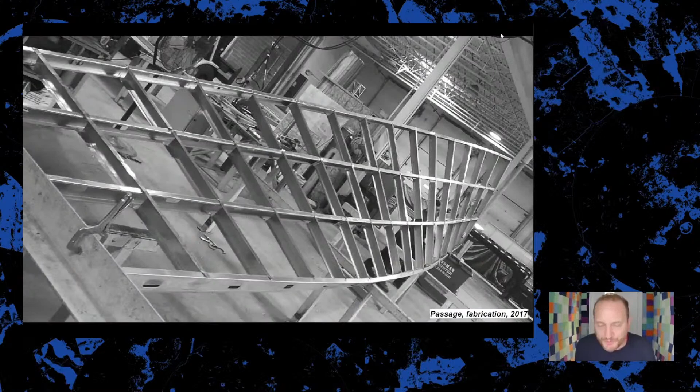We've always been very interested in the pliable and the elastic—experimenting with how one would live in an emergent, dynamic context in which things and people act and behave in ways we ourselves could not anticipate. We like to bend and ply and shrink wrap and extrude and pull and bend, not just in models, but also with the material itself.

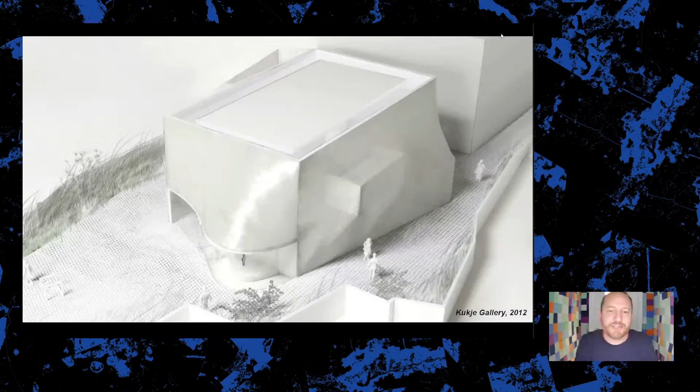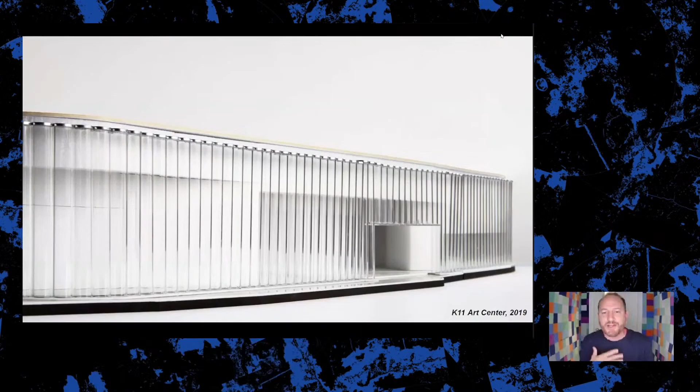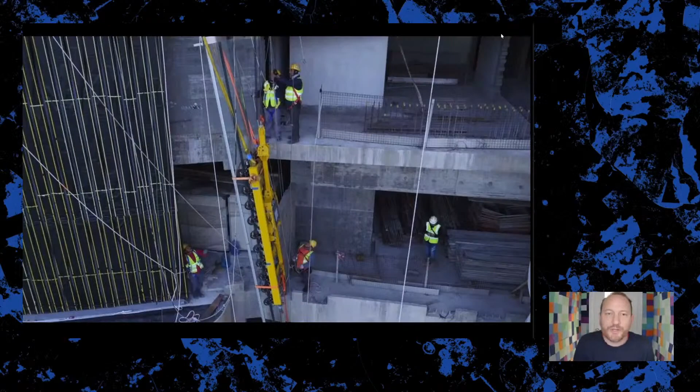Or, for instance, in Hong Kong, where there's an interest in refraction and depth of a facade that needs to sit in the center of Hong Kong harbor—we end up in a very different process, in a factory in southern Germany. You couldn't be farther away from the village in China. Then, with alpine-type construction, we hang 400 tubes on this podium on the harbor front of Hong Kong.

That idea of elasticity and the pliable, but also experimentation, has led us currently to a broader and more involved practice, wherein we're not just drawing lines, so to say, but there are many strings attached. Today I want to talk about four projects currently in the studio, or just finished recently. Todd showed you the unfinished business—these are the projects about to finish or finishing now.

I want to talk not just about the architectural ideas, but everything that comes with it once you go into the world and work with a wider range of people, on more complex and more involved projects. I'll start with one of the largest projects we've been working on, maybe the most complex and longest lasting. Where we started with temporary, quick installations, currently we're working on something that could take forever, so to say, which makes us think about time and a project in a very different way.

This is the Niagara Gorge, the Niagara Falls, the border between Canada and the US. We're involved here in a strategic master plan for Art Park, which should take at least 30 years. I want to talk about this project because it made us think very differently about the way we as architects actually operate within and on the world. Specifically, it has a lot to do with the soil, the earth, and literally the planet.

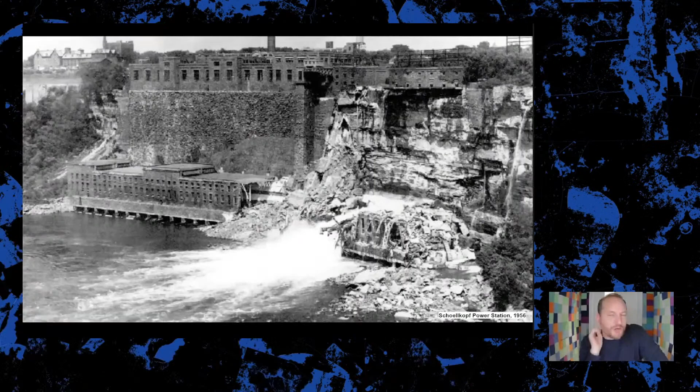This is the site we're talking about, in Lewiston. It burned in 1813, but was constructed earlier and was never there for a long time. It also was the place of the Tuscarora First Nation village. There was a bridge here, where the train came by. You see how the site drops in two plateaus.

The story of Art Park, the park we are currently working on and have developed this master plan for, found its origin in 1956 when a power plant collapsed. The Niagara Gorge, apart from being a beautiful site, is also one of the main sources of energy for New York State, generating an incredible amount of hydropower.

This was right after World War II, when America was booming in the post-war era, and there was a lot of manufacturing happening in north and western New York, and also in Ohio. Much of that manufacturing relied on hydropower, and when this power plant collapsed, suddenly the state was without power.

Rockefeller, then governor—as you can see from his plaza in Albany, a man who liked to use the modernist hand to create and control his destiny—brought in Mr. Power Broker himself, Robert Moses, to build the Niagara Power Project. Within three years, they opened the largest hydropower station in the Western Hemisphere, the power was turned back on, manufacturing stayed, and the economy soared again.

But in order to create this very large power plant, Robert Moses had to dig a very large lake, situated on the land of two First Nations, the Tuscarora Nation and the one I mentioned before. There was a large protest, because they actually had to disown their land to build this power station.

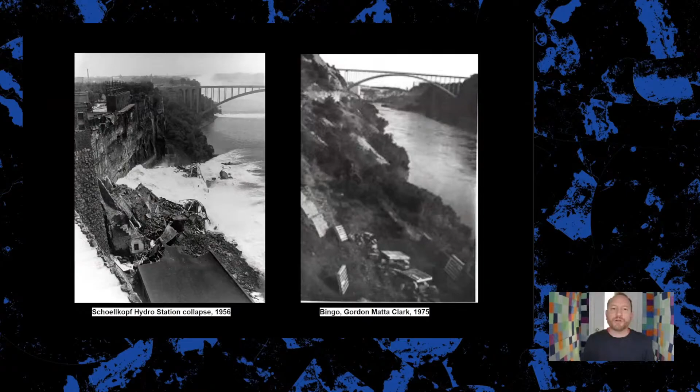In some way, Art Park, as it was renamed, was the birthplace of land art and environmental art. There are a number of very important pieces. For instance, Gordon Matta-Clark in some way reenacted the hydro station collapsing down the gorge. Here on the right, a performance piece.

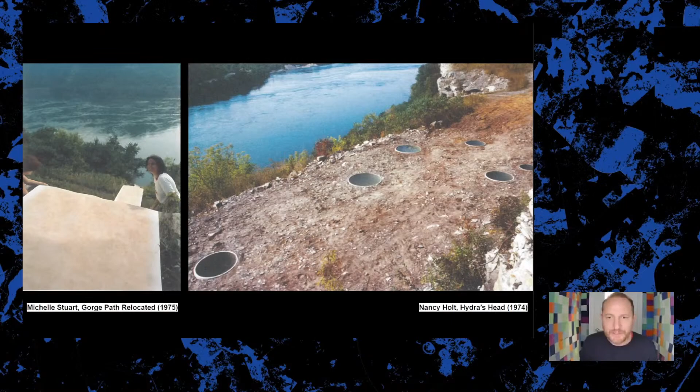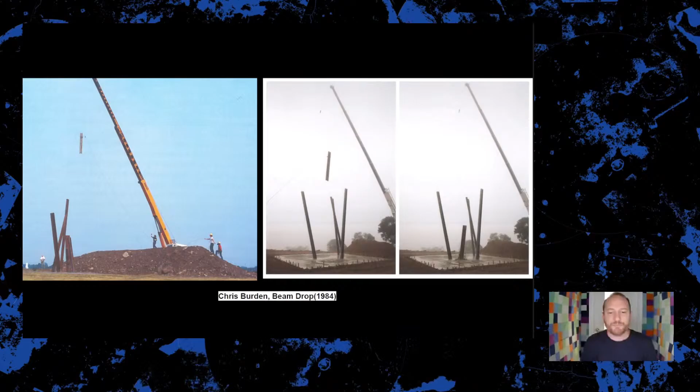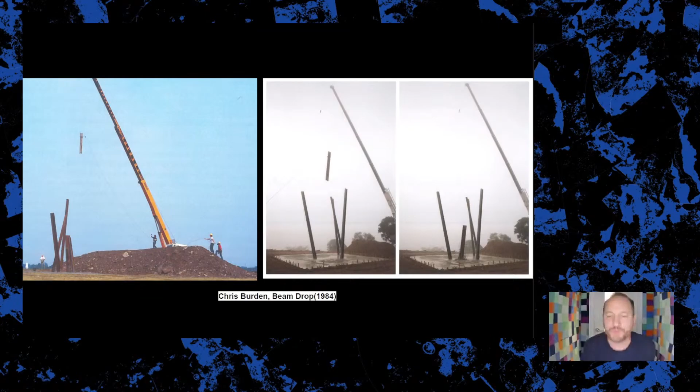And the most maybe violent and most expressive and most aggressive form of land art was probably Chris Burden's Beam Drop, who had a big pool of concrete and then with big cranes, let steel beams drop into our planet, so to say.

So the land there is not a beautiful romantic piece of landscape. It is soil, it's a pile, and it is being worked and reworked, and it has these layers and layers of history. After '84, the more experimental phase stopped, and it became more of a destination for community art.

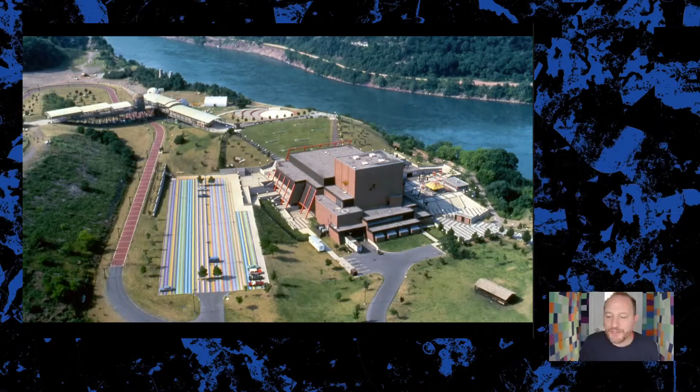It's still there, and it's very hard to use. But in those days, it was a very successful place, and many of the local residents loved it and had some of their best experiences there. For anybody you ask, who is of a certain age, Art Park was an important site.

Now, fast forward a number of years, the funding dried up. There is no more Rockefeller. There's no more experimental art. Land art has shifted—now there's environmental art, but not on this site. So in some way, the site is still there with all these layers of history and all these different sort of sediments. But in some way, it has lost its pulse.

So we were called in through a competition and an interview together with West 8, the landscape designers, and Charcoal Blue, who do theater and venue design, to make a master plan.

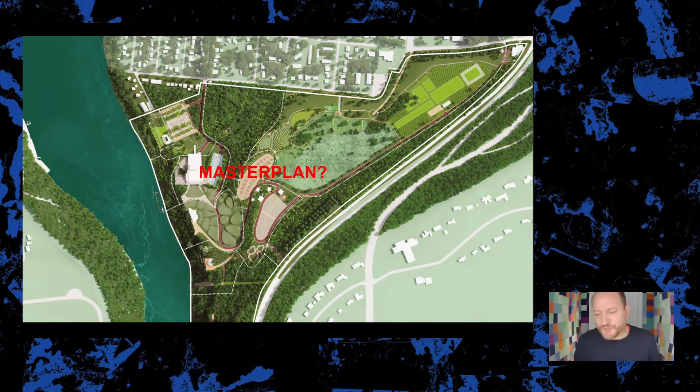And how do you do a master plan after so much has happened to a site? First of all, we don't really believe in masters. Maybe we believe somewhat in plans, but we also very much believe in processes rather than plans. The plan sort of suggests that you know what will happen. I think for us, specifically a project like this, we wanted to approach it in a different way.

We visited the site. It's beautiful. You see the gorge, the sort of depth, the section of the landscape. It's intimate, and at the same time, higher up, you have this expanse. At some points, you can see Toronto at the horizon in Canada. But in many ways, it is sort of a quite empty and very inactivated and sleepy site.

Only once, or basically 12 times a year, it's still used for classic rock concerts. And the director told us there's a problem: the audience is dying, the acts are dying. What should we do?

We visited Sammy Hagar. He, at 72, says we need to do something. He brought Jason Bonham, the son of John Bonham, in, but still it is a very particular usage, which only happens and only activates a few, so to say.

So we started to just listen, and we started to listen to the people who had a great time there, and they were just reminiscing about how we could bring back that old energy that Art Park had.

But we also toured the site with representatives of the First Nation, the Tuscarora Nation, and they had a very different approach. They said, we don't want you to just recognize that this is our land. We want you to not touch it and be respectful, and not plan, certainly not touch, certainly not dig, certainly not unearth anything that is here, and just let it be, so to say.

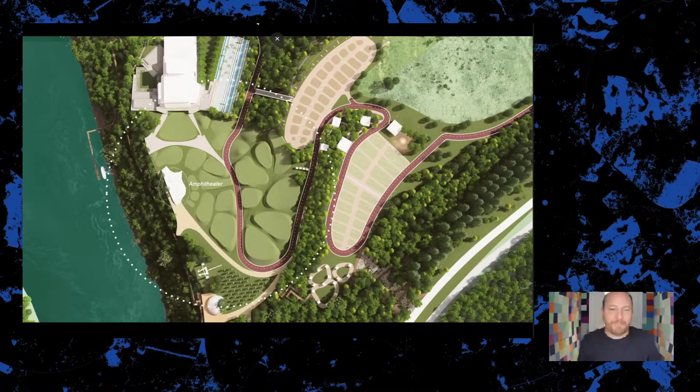It comes through here, you see the spine, it comes through this renewed amphitheater. One of the first things we needed to do for Art Park to survive was to reorganize the amphitheater, improve its sightlines, and make it a year-long venue again, because many bands and acts were not wanting to play here anymore.

So this first project we're now pushing forward is the reconstruction and upgrade of the amphitheater. We wanted to work on this idea of the artificial landscape, not by excavating, but by adding a number of artificial hills that are, in themselves, when nothing is going on, a very attractive and maybe somewhat surreal landscape.

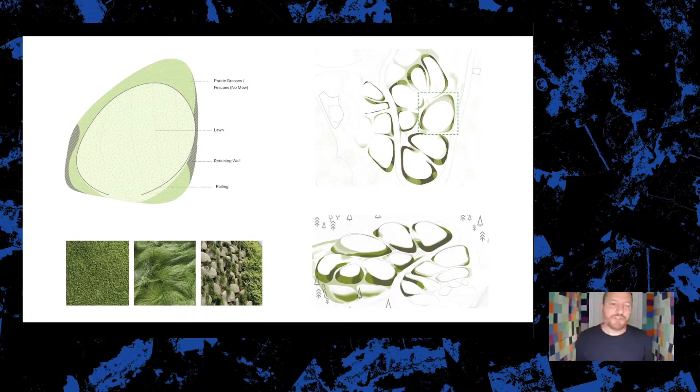At the same time, when there is an event, it can be used as a way to watch it, to see what is going on. So we worked with West 8 to create these artificial knolls, these artificial hills, that together become the amphitheater. They shape this vineyard-seating, 10,000-person amphitheater that grazes the hill along the gorge.

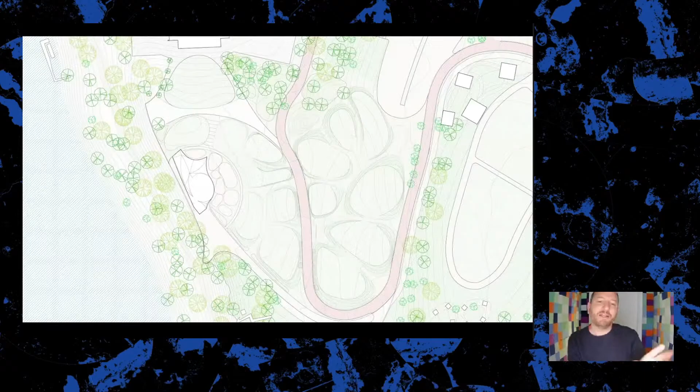With a view towards the water as you come down, you see the red spine going through. Here you see it in section, here in plan when nothing is happening, and here when the events happen. The first part is really a fixed stage, but the rest is hills that are also fun to sit on and picnic when nothing is going on.

For the band shell, this first project, we wanted to work with a somewhat futuristic and experimental structure, a tensegrity structure that gets draped with a skin that generates energy through the sun, helping amplify the music, because you'd be surprised how much energy a live stage and live concert actually takes.

The idea is that we would run the entire concert on renewable power, both by tapping into the hydropower and by generating energy through the band shell itself. As a first teaser, we recently reinstalled an installation we had done for the High Museum in Atlanta last year, called Murmuration. It just landed last month and opened on site as a first step in this ongoing project, which probably will take three decades.

I'm trying to keep the pace so that Todd and I can still have a conversation, so I'll switch from one countryside to the next.

This one is northern France, near Strasbourg, at the border of Germany, in an area that throughout history has been both part of France and sometimes of Germany. Meisenthal in the Vosges is a hilly, beautiful, wooded landscape, and this landscape was a very important site for the birth of glass making and the glass craft within this region.

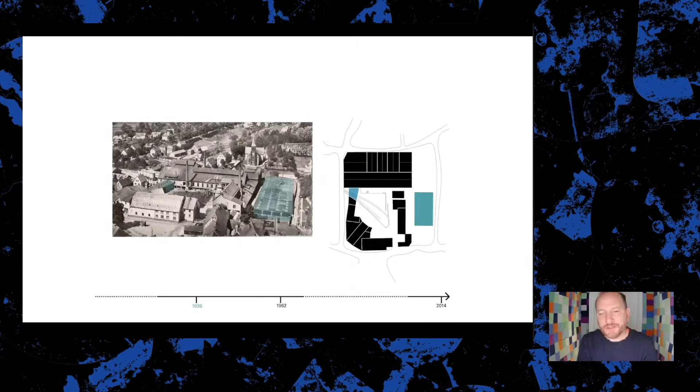In 1969 it went out of business because of different manufacturing techniques and the way the world transformed, and the factory closed. Over time, the morphology of this site became one of addition, erasure, removal—different layers of time that are very clearly legible and present on the site.

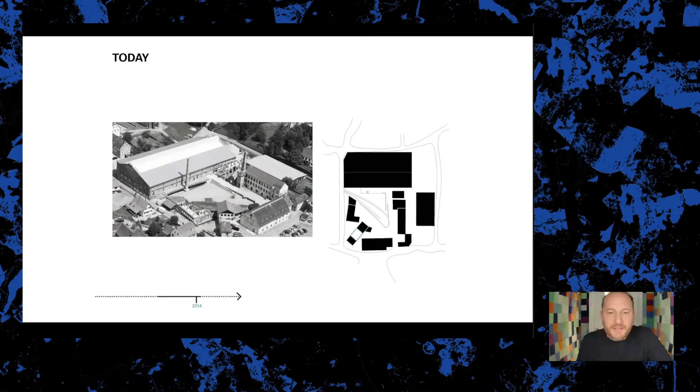This is not today, this is six years ago when we were invited to do a competition. Here you see how we found the site in this bucolic landscape. Within the center, the old factory was really the town square—you see the church is even off-site here. The factory was the de facto square, and the yard of the factory is where the entire community came together.

When we came, there were three different organizations using the facilities. In the big old hall there were concerts, mostly regional, up to 5,000 people. Then there is a glass blowing facility where quite good artisans from around Europe come to do glasswork in a studio setting. And then there was the old office building of the company, now a museum for the history of this town, the region, and the factory.

And then some ruins over here. So the job was actually to transform these independent organizations into a centralized center for glass, bringing these three completely independent, separately operating organizations under one roof, so to say.

We thought of these four elements and the elemental aspects of the making of glass, thinking about the idea of the earth becoming molten, so to say, and shapeable. We started to think of these layers of history, layers of time, and the pliability of that sediment.

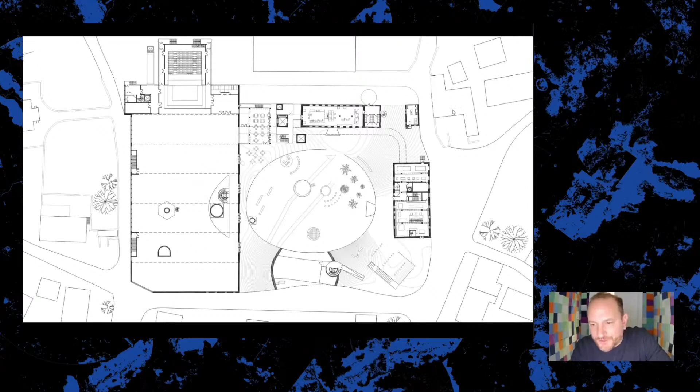We reclad one of the structures and built a double, in a way, as new glass studios—you see them over here. This is the upper level of the ground, so to say, and here's the map of the lower level.

And so here you see the new entrances, the dressing rooms and the backstage area, the entrance to the museum, the entrance to the store and the education facilities, and here the entrance of the museum, or of the glass studios itself.

This is about to open in January. When you come to town, you see these really quite interesting additions and material piling up, so to say, of different eras. And suddenly this building appears, juxtaposed, the old and the new. But it's not just the old and the new, because it's a constantly evolving series of additions and removals.

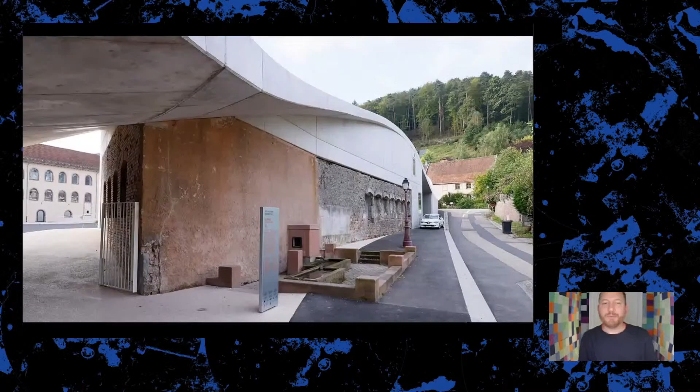That have happened to the site over time. And ours is just the last in an ongoing process. So the theme, even at this site, of history continues. History sort of flows, and you see in the way the layers come together, this build up.

This is the entrance you see under the slab, if you want, and you come into this old square. We kept the old train tracks that were used to bring the wood, basically, that was used to heat the ovens in. Here you see the old building and the two new glass studios.

One is poured in place concrete, the other is precast concrete. Here the entry to the music venue. Looking the other way, this is where the cafe and the store is, with the education spaces above.

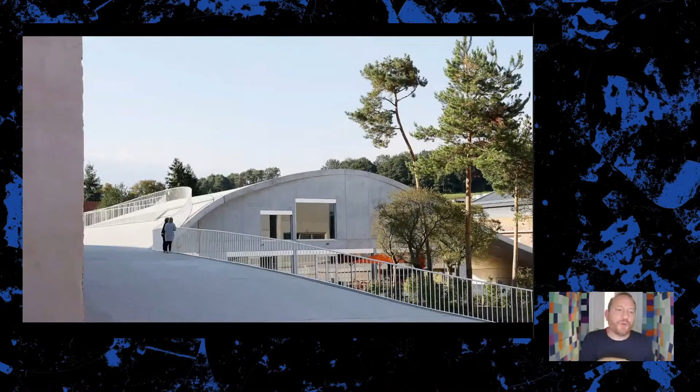There's ways to get up and under the slab. Here's the entrance to the museum. This sort of engagement, being close to these layers of material and time, and then being able to go up and look back at it, makes for a very dynamic and very communal new experience.

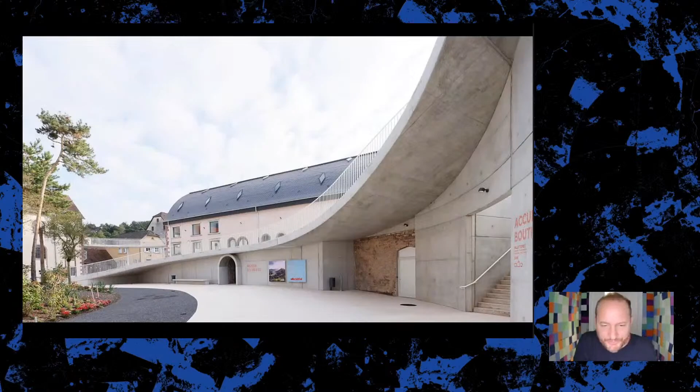We inserted a black box theater in the performance space, which is very flexible. One way it's like a completely closed space for 250 people seated, but then the stage can move to the back and open towards this big hall, which you see there in the back.

And so the stage, sometimes they can play the other way around, and there's 5,000 people in the audience of the old factory hall. And here you see the glass shops and their theme of the history continuing.

So from northern France, there's two more stories I have to tell you, with all the strings that are attached. We're going to Mexico, to the city of León, which is 3 hours north of Mexico City, where we were asked to think about and respond to a complex issue, which is housing, generally affordable housing in Mexico.

In Mexico, if you know it a little bit, there is a large population of informal housing. A large part of the population lives in unregistered homes, so to say, just because there's no access, they don't have financial access to the housing market, and because people can build on public land without necessarily being removed. So there is this question of how can we help or make these people part of the formalized housing reality.

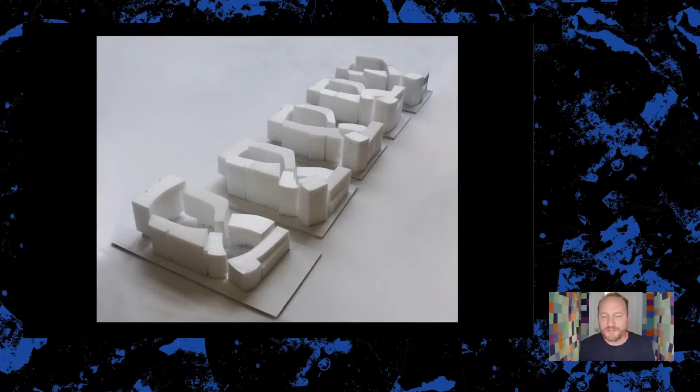The second thing we thought is that housing often becomes very anonymous — you don't know anymore where your home is. Since it was a corner site, we felt we needed something with clear civic presence on the corner, but also broken down, not some massive singular building. So we thought of it as an assembly of different parts in which you can recognize where you live. There was an ambition to make all unique homes, where every plan is specific, so you know your home is a little different from your neighbor's, giving people something to talk about rather than everyone living in the same box.

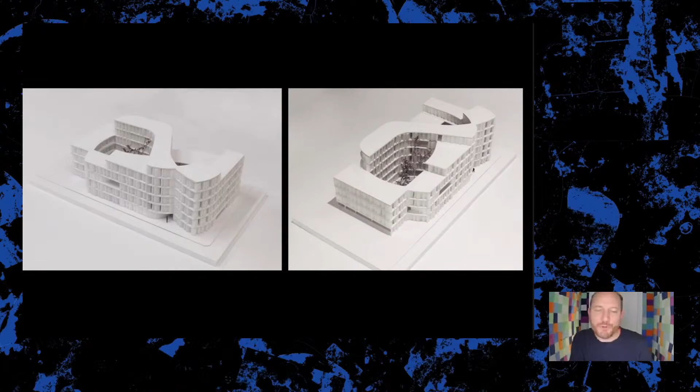So this is 60 units. Our building budget was $2.5 million to build these 60 units, so we had to be very, very thoughtful about how we did it.

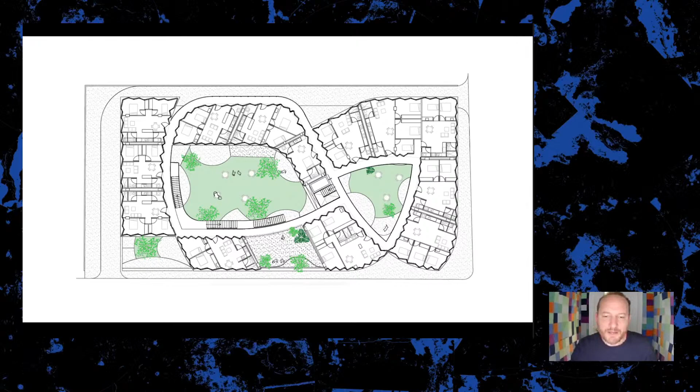We also wanted to make a building that didn't need a lot of machines, and the courtyards help a lot with natural ventilation. They also allowed us to have daylight come in from both ends, with the possibility of cross ventilation. So we made this sinuous plan with an open corridor bringing you to the homes — you enter on the ground floor here, there's a staircase, and an additional staircase takes you up. There are spaces we opened up for communities, places where we don't build units, but that people can share and gather together.

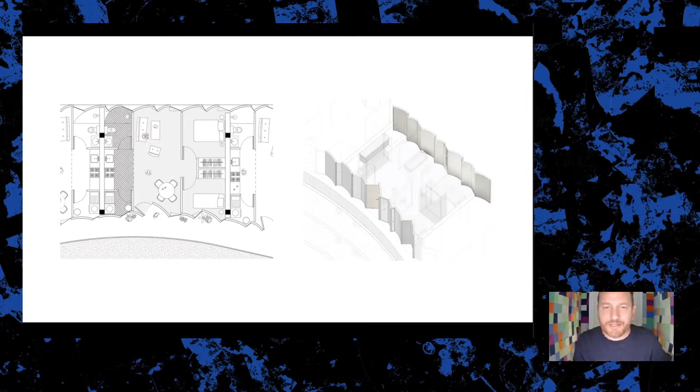But there was this challenge with people walking past your house, so to say. So we thought we'd rotate the facade so you can't look straight into somebody's unit, but always hit it on the oblique. And we designed it initially with a tight budget, because there was not much there.

We thought we need to prefabricate everything very simple: two types of panels, two types of windows, and call it a day. And so this was the design.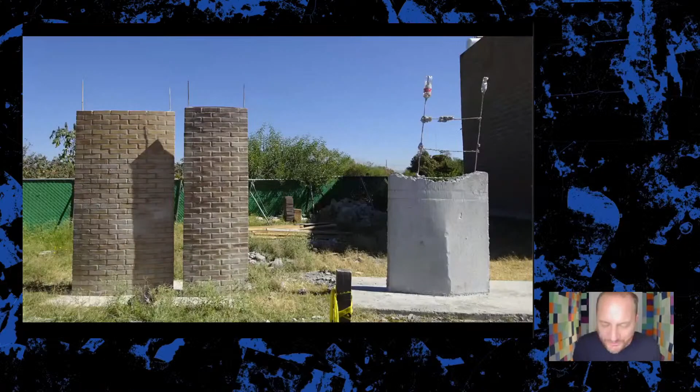But very quickly, they tried to work with us, and they said it's very hard for us to do the precast panels. We did a mock-up for you here on the right. Didn't really work, it sort of fell apart.

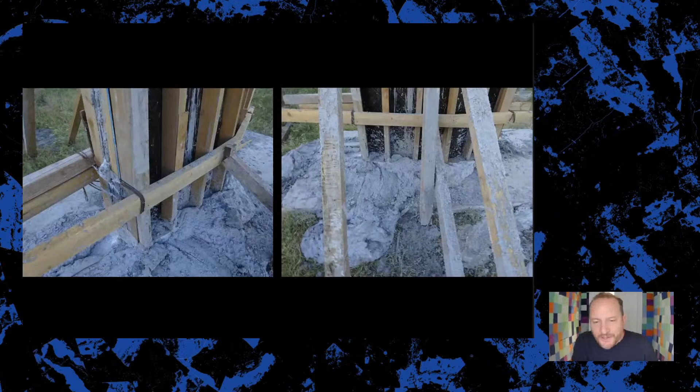We cannot do this. Then it became clear that in order to install one precast panel, we have to get a truck from Guadalajara—it's a 4-hour drive. We have to get it from this one concrete plant that can do it, and we have to get the one guy with the crane to install it. And so it takes that long.

For the same cost to install one panel, we could have 30 people work for 30 days. So rather than depending on the truck, the factory, and the crane, we worked with a local manufacturer to develop a cementitious block that is exactly 17 kilos, the maximum amount a single worker is allowed to carry without a crane or any other machine. This could be individually carried, meaning many more people could participate in building the building.

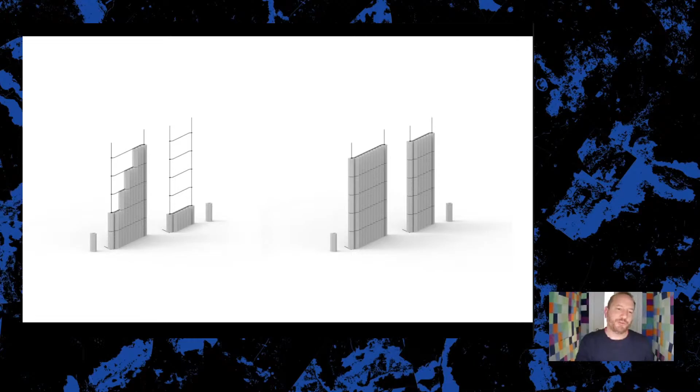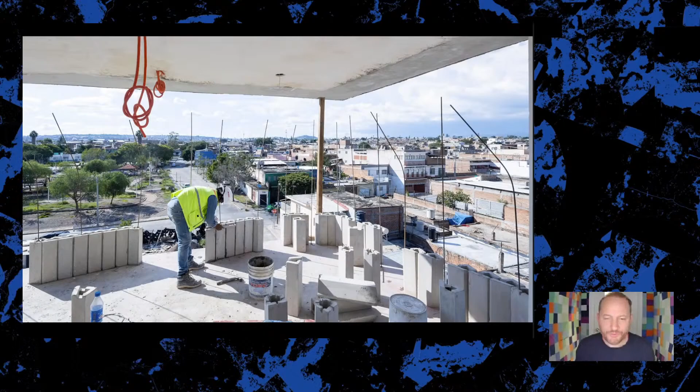So rather than precasting these walls, we built them up out of these blocks. We did a mock-up you see here, and that's the system which hadn't been used before—a custom block we made, but then we used it to make the entire facade. Here you see it, and in that stack there's a little bit of texture, and the hand really appears, giving a much stronger sense of craft and of handmade.

In some way it connects much more to the context and the surroundings. Here you see it on the weekend—there are markets around the whole site. This is on other days, with the entrance here. A few steps up, the ground level units are commercial and accessible units, and the higher levels are 3-bedroom and 2-bedroom units. This is the small courtyard.

Here you see the big courtyard with the stairs going up. You see one of the communal rooms over here, another one up there, and a roof terrace as well. Looking down into the small courtyard, and the staircase in the middle weaves the two courtyards together. Here you see the unit.

Obviously there are some strange corners, but we also feel there's enough creativity and craft, so to say. These units will be owned by the people that live there, so we also expect they will manipulate them, paint them, change them, and work on them.

The facade, possible because of the climate, is this single stone, and that's both the outside and the inside wall, so to say.

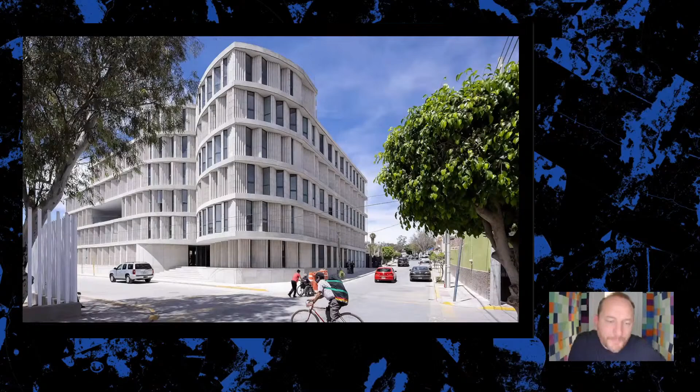Here you see it on the corner in its site, and here in the context, close to the city center, in an area that was built informally many decades back, but is now much more part of the center of the town.

It was a prototype, but now there are two others of this typology being developed—not by us, but by other offices. The client here was the city itself, which is quite rare in today's day and age.

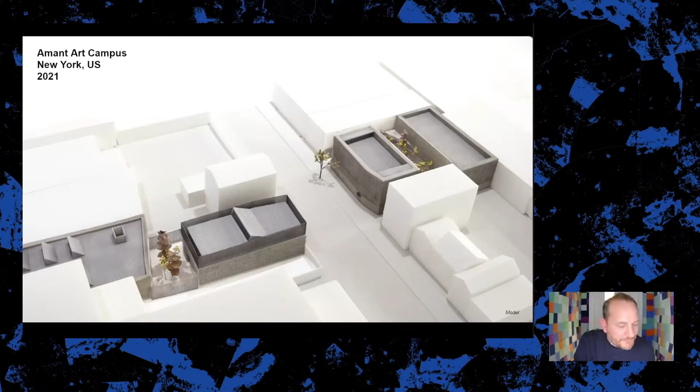I'm going to end with one project still in the process of being completed. The official opening date is November 15th, but it is 4 buildings, and similar to the other building in France, it has been opening over time as a campus. Some of it is already open, but there are still a few parts we're working on and finishing—an arts campus, a residency in Bushwick, New York.

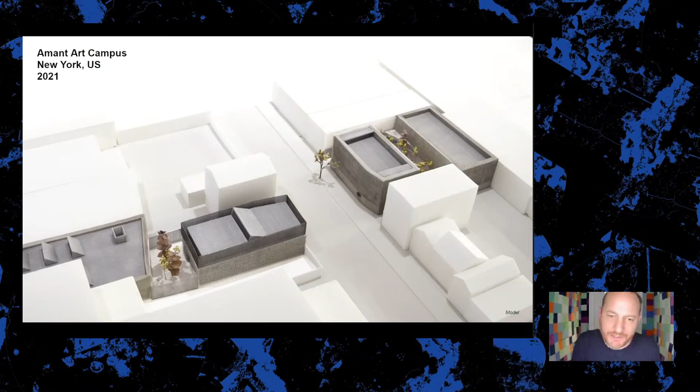Bushwick is a very industrial area, maybe people know it—it's also sort of hip. There are galleries there, and it's the informal and casual city in comparison, removed from Manhattan, if you want. Our client has an arts residency already in Italy and had an interest in providing spaces for artists to work and just be—a very quiet place, not necessarily in the center of Manhattan, but where they could concentrate, come for 3 months, and work on whatever they wanted.

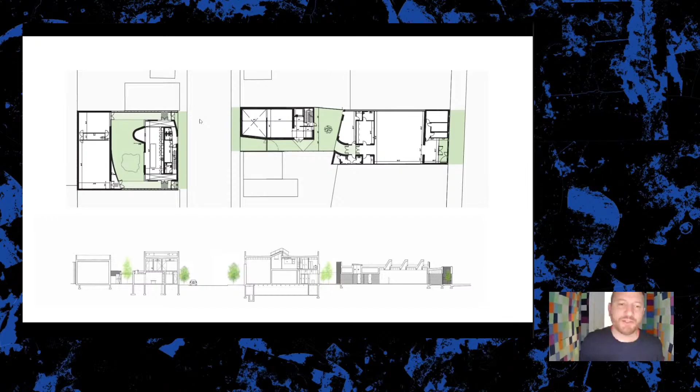One very large open gallery space, a very intimate gallery, a very tall double-height gallery over here, and for the performance space we made two rooms that could be accessed either way—so there could be a performance here with this as backstage, or a performance here with this as a foyer where people gather, functioning as a green room, or vice versa. All of it was trying to design spaces that allowed different programs and occupants to imagine how to use them.

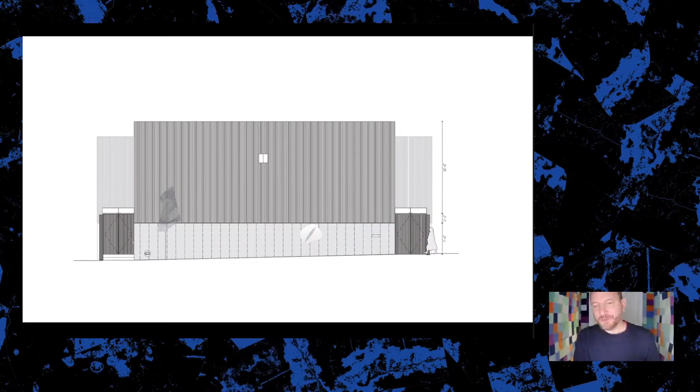So the task with these simple boxes is how do we give them a certain expression and agency, and also scale them down to a human scale, because it's an area of just big boxes. We thought every elevation needs a horizontal datum where there's a change in materiality or texture—you'll see they're relatively high buildings, some two stories, but they have this horizontal datum to bring it closer to the ground.

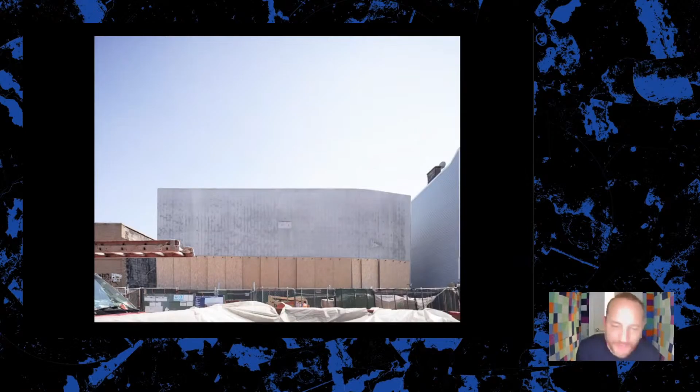Then we worked on giving a real texture while using very standard, industrial materials—working with concrete. You'll see some construction process pictures now, showing how we worked with local tradesmen to create a set of volumes that is both simple and robust, but also subtle.

The challenge was how to create a certain unity between these four different buildings while also giving them a certain particularity. The two residency projects are made out of cast-in-place concrete.

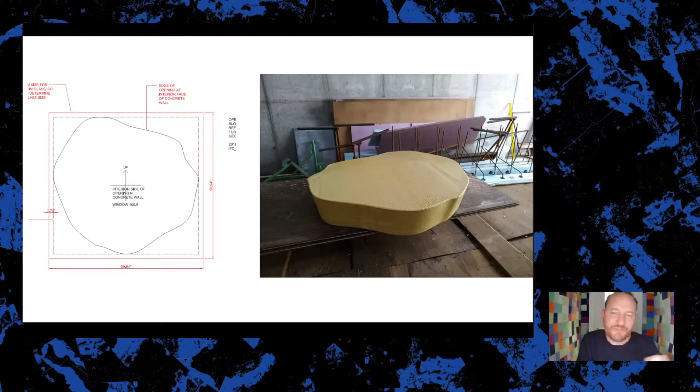They have a texture shift, so there's a corrugated concrete on top and a smooth concrete at the level below. We then designed certain particularities to the building. So once the buildings have their base set up with these two materials and finishes, we added particular details that give a sense of orientation.

Here, with a little wink to Lina Bo Bardi, we introduced this porthole window that sits there, and you can see all the way through the site as you walk through on this pedestrian path at the end.

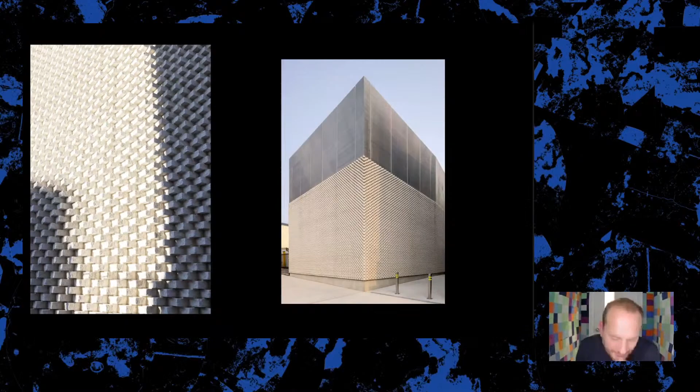For the other building, we worked with a standard brick. It's a cementitious brick that we rotated. It basically has four different faces, two smooth sides and two rough sides, so the pattern around the building changes because you either see fully smooth, smooth-rough, rough-rough, or rough-smooth, so to say.

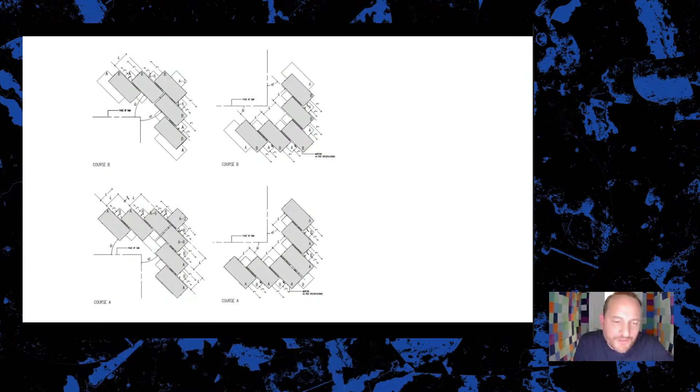So here we did a little mock-up with the masons of how the brick needed to be installed. Here's the course pattern of the brick. We mocked up every condition, how the corners sit in there, and you see how that results, creating a really interesting effect with light and shadow that changes as it moves around the building.

The renovation building, we added a courtyard in front. This is the storefront you saw before with the stone shop. What we did here is rotate the standard brick. A brick is extruded when you make it, and has a certain pattern. By rotating and using the back of the brick, you don't see anymore where the different bricks sit, and it gets unified within that pattern.

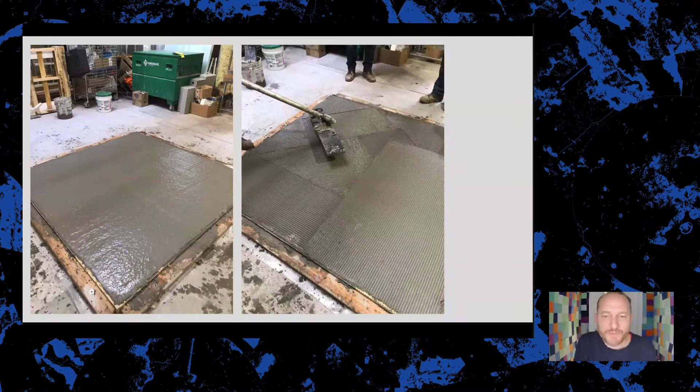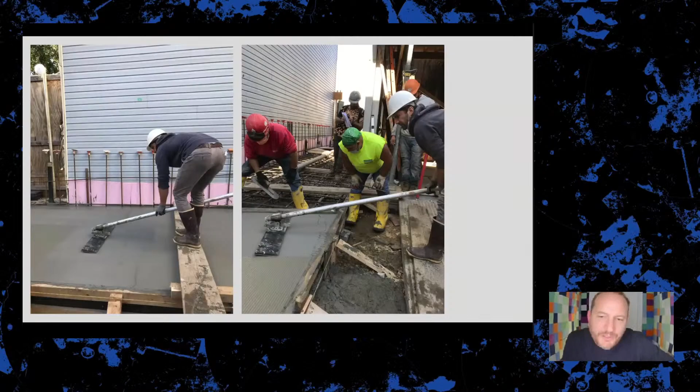Lastly, we unified the ground, which is just standard sidewalk material, but we made a custom rake and this custom pattern, working with local concrete guys to create this bespoke, almost Zen garden-like raked pattern that you see now, which unifies the entirety of the site and brings that topography together.

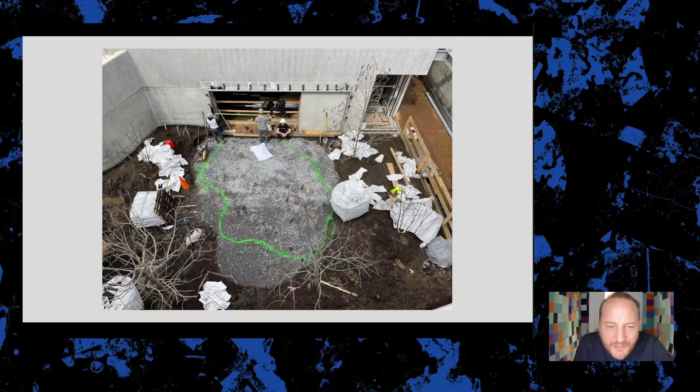One more detail, I'm not 100% sure what it's all in here, but this is the last outside terrace for the artists to sit on, and some of the cutoffs of the site we just poured into the concrete, almost as if there's a post-apocalyptic condition, in which all these things were embedded within that site.